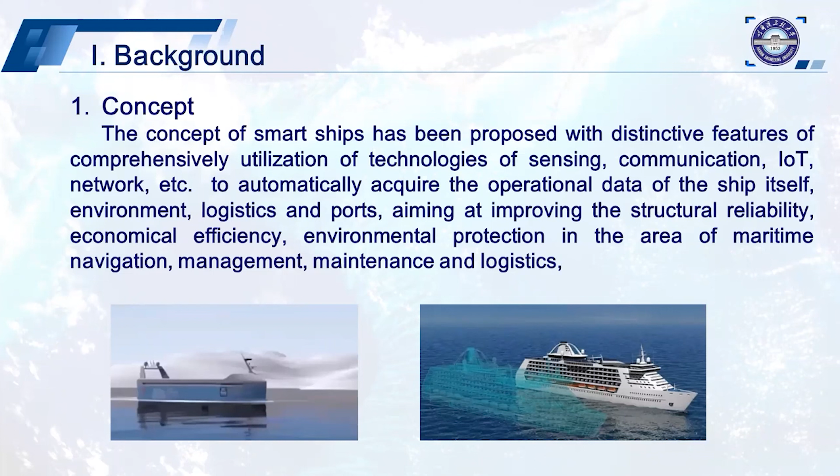So why smart ship? In recent years, we probably have already had the sense that classical mechanics, including structural mechanics and also marine hydrodynamics, have already been quite well studied, and we don't have much new technologies to improve the efficiency of the ships. I mean, we don't have much more we can get from classic structural mechanics, including design, maintenance, etc., to improve the safety and efficiency.

And on the other hand, with the development of hardware technology and the development of software and algorithms, we are able to apply those technologies in the traditional ship industry. So with the help of computer hardware, sensing technology, and algorithms, we're able to improve the safety.

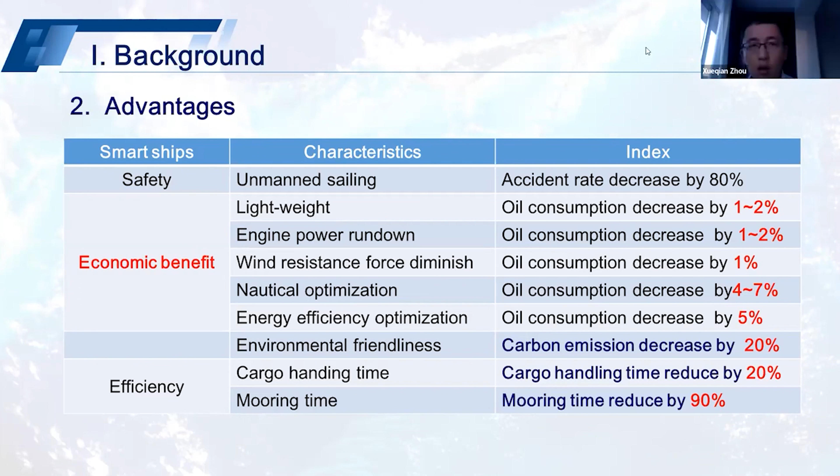Because as we know, almost 80% of ship accidents are due to human factors. So if we make the decision with the help of a smart system, or let the ship make the decision all by itself, we can reduce the possibility of accidents.

And of course, we are also going to have benefits on the economic side. We're going to have better designs to reduce the weight of the ship itself, and from which we're going to reduce oil consumption by 1 to 2%. The same thing with engine power, resistance force reduction, nautical optimization, and energy efficiency optimization. And we're also going to have benefits for environmental friendliness, reducing carbon emissions by approximately 20%.

This is about safety and economic benefits. And for operation efficiency, we're going to reduce cargo handling time and mooring time, which also means we're going to improve the rate of use of the ship itself.

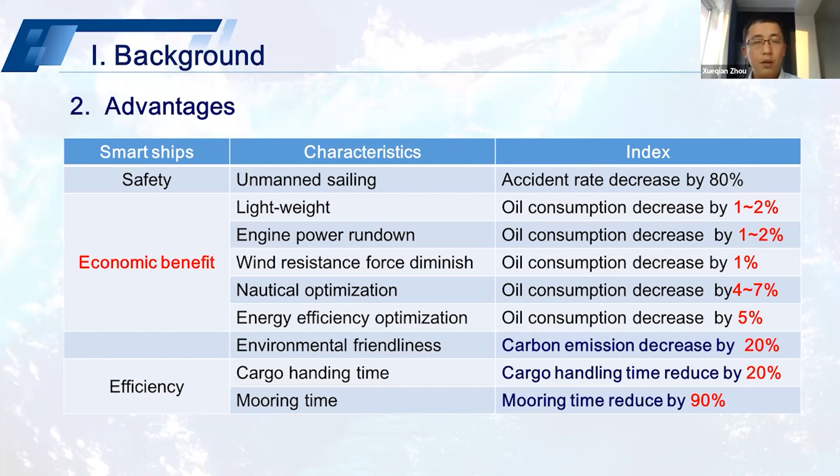In recent years, the concept of smart shipping has drawn the attention of many international organizations like IMO, ISO, and other organizations like the classification societies. The Maritime Safety Committee of the International Maritime Organization carried out a plan for maritime autonomous surface ships in 2018, about 4 years ago. The Working Group 10, under the supervision of Technical Committee 8 of ISO, also focused on the timely establishment of relevant standards on smart shipping in 2017, because before that time there were no standards.

Then in the ship industry, we also know ABS and DNV. They are well-known classification societies, and they have also released classification rules and guidelines for smart ships.

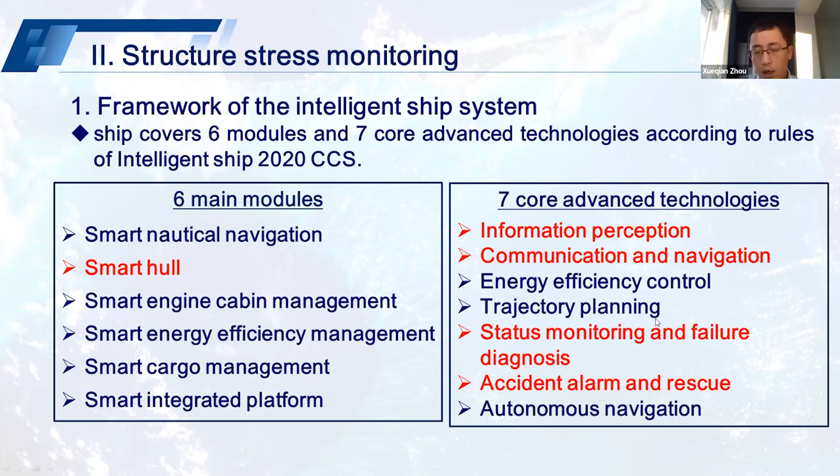We have several main technologies we're going to use in smart hull, but among those, the most important are the information perception and the status monitoring and failure diagnostic technology. To obtain the information about the ship itself, and also to find out the possible failure, in addition to the hardware, like the sensors, the strain gauges, the sensors for acceleration, we also need to use other means to obtain enough information for the analysis and also for the decision making.

The failure diagnostic technologies include, for instance, we have sensors installed on the ship, but we know that no sensors are perfect, and the data we acquired from the sensors may have errors, and mostly actually they have errors. So how are we going to make sure that the discrepancies in this signal are caused by the structure itself instead of the sensors? Or how to make sure that the discrepancy in the signal comes from the drifting problem of the sensors instead of actual failure of the structure?

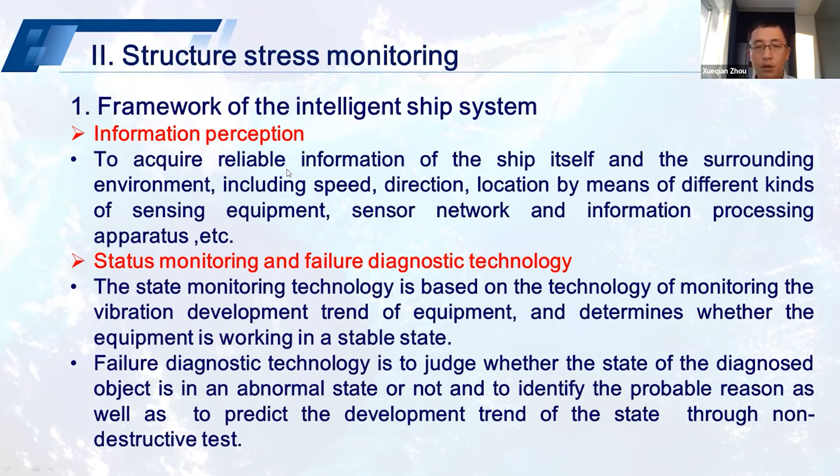The concept of smart hull is relatively new, but structure stress monitoring is not new actually. If I remember correctly, the first application of structure stress monitoring was in the 1990s, and as time goes on, because of the advances in sensor technologies, and the computer hardware is becoming better and better and fast enough to process the amount of data.

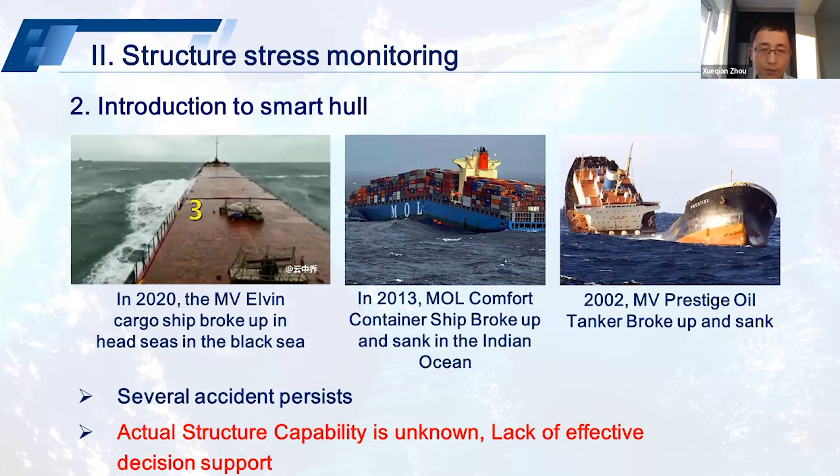The core idea of smart ship is, for instance, in the case of us humans, we have 5 senses. We can see things, we can touch things, we can taste, we can hear, and we can smell. So our brain is like a computer. Our brain is going to process all the information from the 5 senses, and then we're going to make a decision. When it comes to ships, the process is similar.

So we have the sensors to measure the stress, the acceleration, the temperature, the heading, the speed, and the waves. And there are all these sources of information, and we develop a sophisticated system to process the information, and we can have a decision for the best choice strategy of operation.

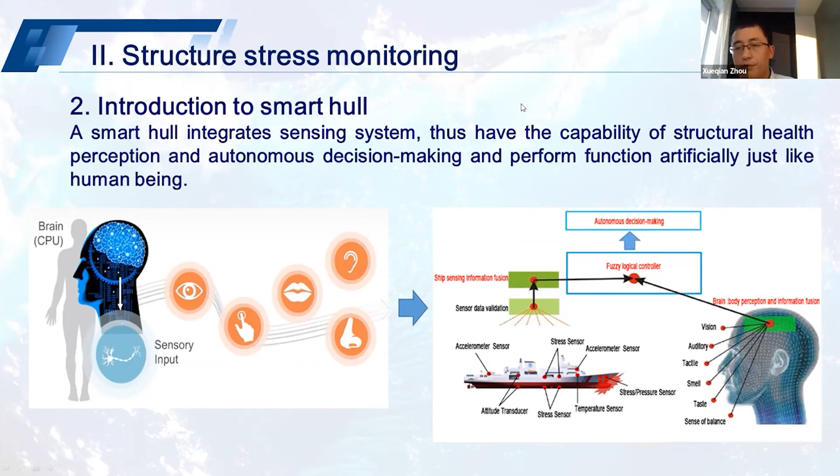When it comes to smart ships, it doesn't mean that we can just simply use some machine learning methods to achieve the objective. We also need to study the classic subjects of naval architecture. For instance, we need to study the wave load calculation and analysis,

because we need to calculate, for instance, the waves acting on ocean-going ships to find out the wave loads, and then we can use finite element analysis to find out the locations where we have high stresses, or we can capture the behavior of the ships, like slamming, sloshing, springing, collision, this sort of responses.

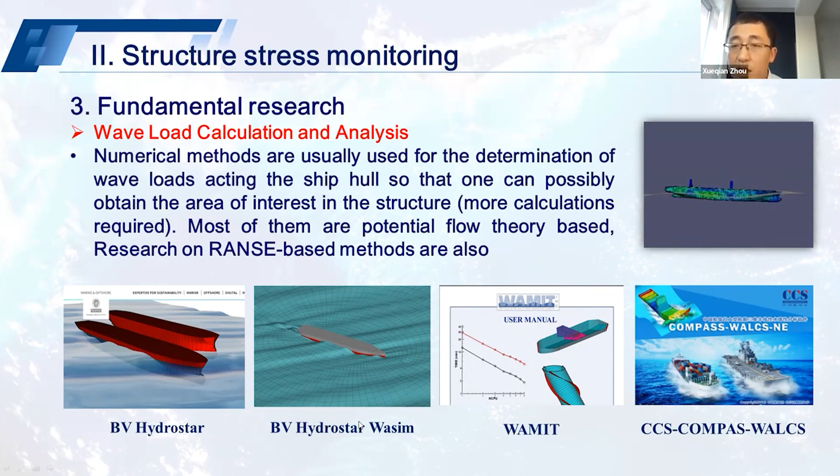And then we also have WAMIT, which dates back to the code by Professor Newman from MIT. The latest version is 7.4. And there is also the COMPASS suite for the calculation of wave loads released by the China Classification Society.

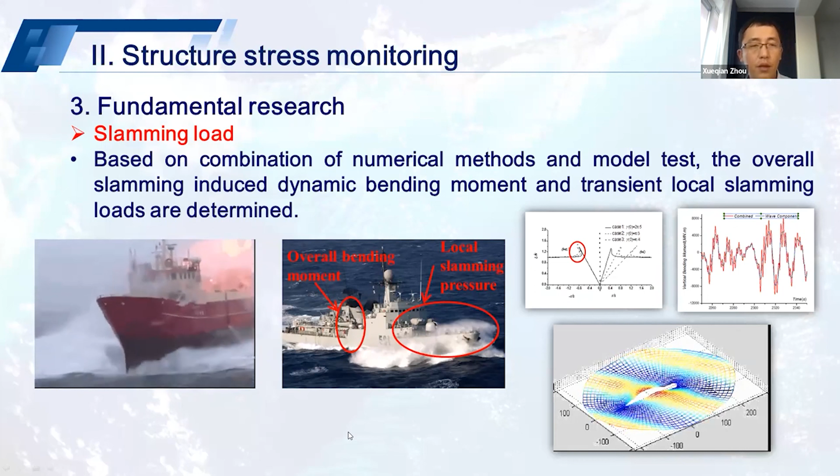And for slamming, because for most of the potential flow based codes, it is very difficult to find out the pressure acting on the flare of the hull, in this case we also use RANS-based methods for the study of slamming loads. Slamming load is important especially for ocean-going ships, like in the North Sea and the Atlantic Ocean, where we have very large waves, and ships with big flares may experience slamming loads.

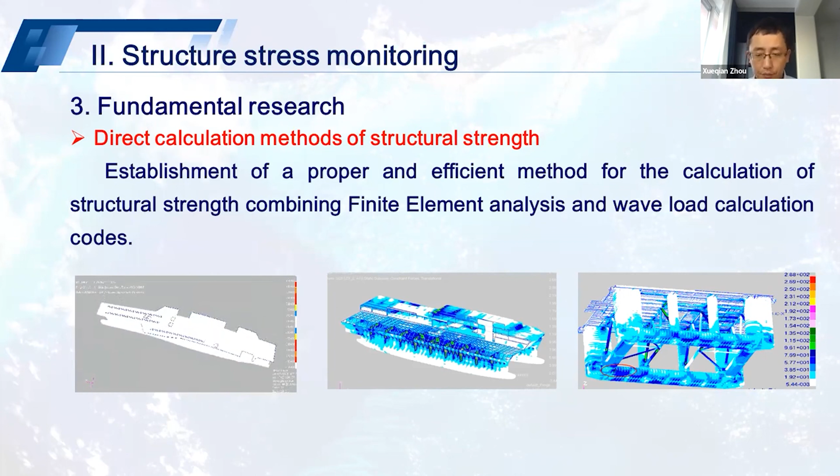Then the other one is the direct calculation methods of hull stress. Basically, it is to calculate the stresses of the structure using wave load calculation codes, and then with the finite element methods to obtain the stress distribution of the entire structure in different cases.

In addition to the numeric methods, we also need to do the experimental study and also the tests at sea. One reason is that in a towing tank, first of all, there is a scale effect, and then the waves we can produce in a towing tank are not actually the exact same as the waves we experience at sea.

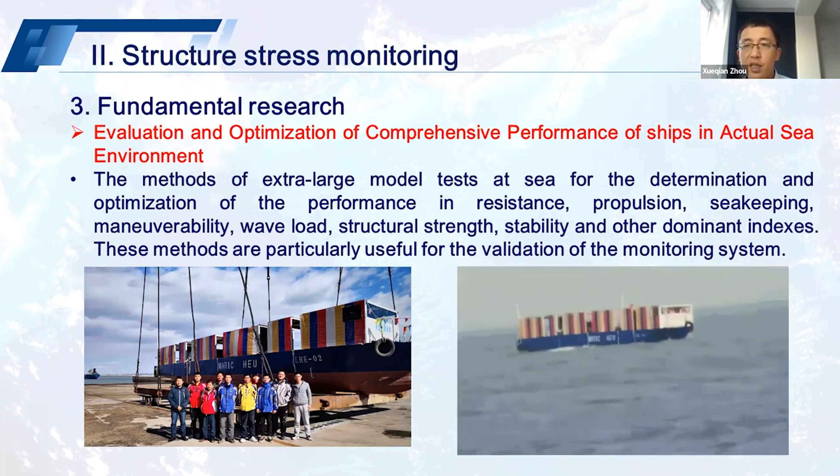So for this reason, some researchers have been carrying out very large model tests at sea, so as to eliminate the shortcomings of the tests in a towing tank. The first one was more than 20 years ago. The French Navy carried out a large model test at sea for resistance and propulsion. And then this technique has been used for the investigation of other performance like the wave loads and seakeeping, etc.

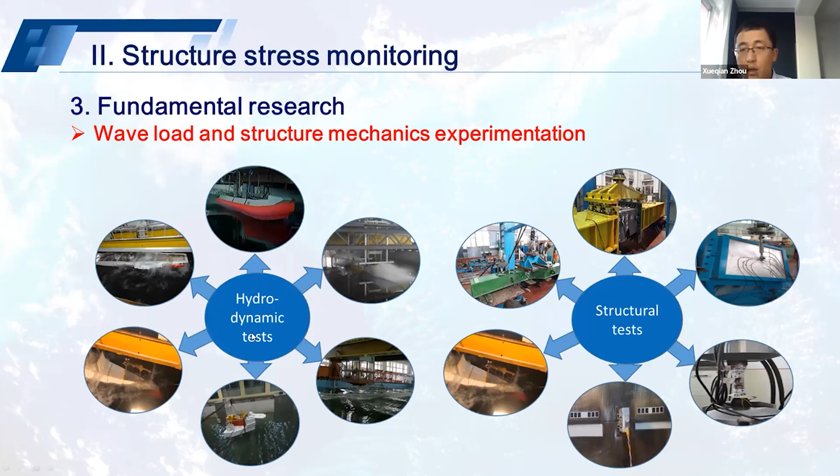So when it comes to this structure, we need to determine how much is the load acting on the structure. So for this, we need to do hydrodynamics. So there are various topics in hydrodynamics, and we need different kinds of facilities. And the same thing with the structures. We also need to use the right facility to do the investigation.

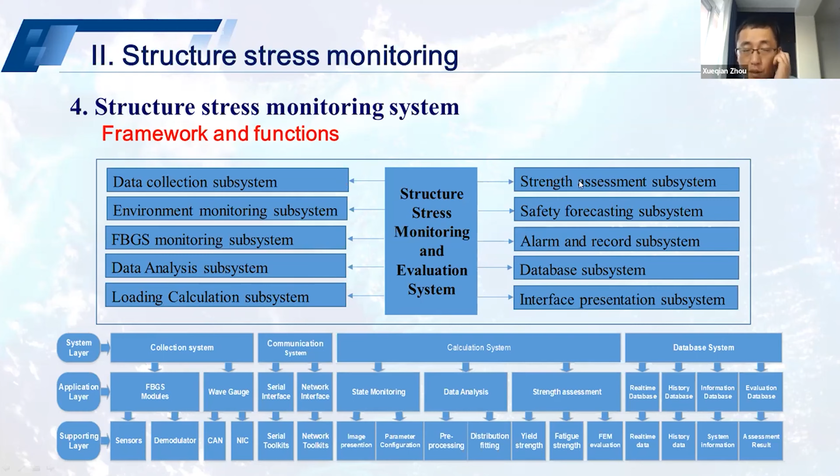So for an example of the structure stress monitoring system that we have been using here in China on many ships, there is this data collection system that acquires the information of the state and also the structure stress, and then we're going to process the information in the system.

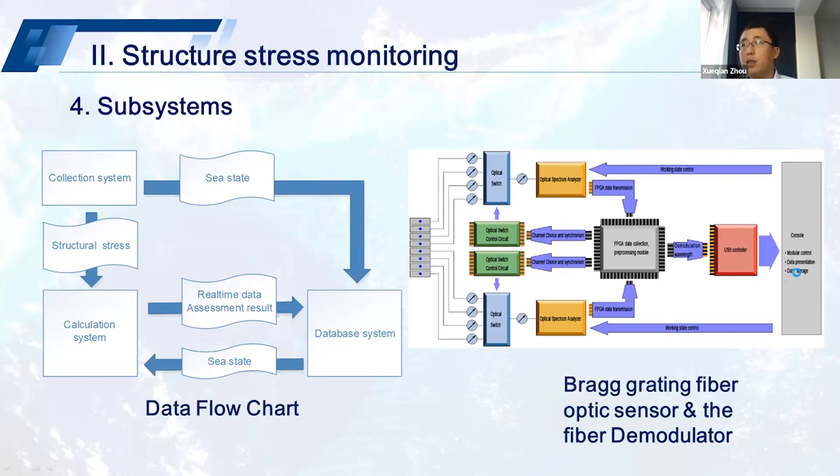And on the other side there is the so-called fiber demodulator, so it can read the change in the wavelengths and then find out the deformation at the location where we have the sensors, which means that we're going to have the strain, and then we can do the calculation. We can find out the stress.

And this is an example of a communication subsystem. There are also many elements. We have the information about the stresses, but sometimes we also need the information from other onboard systems, for instance, the waves, the speed. We also need that information to make the analysis. Then, of course, we need to do the calculations. There might be a lot of calculations on board.

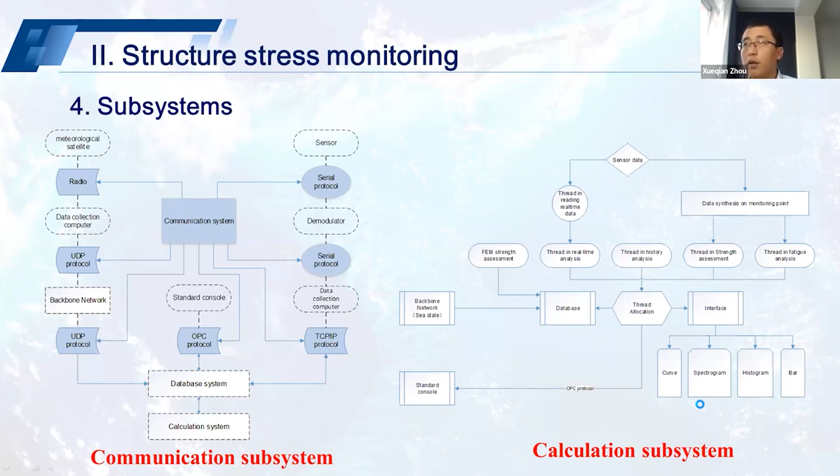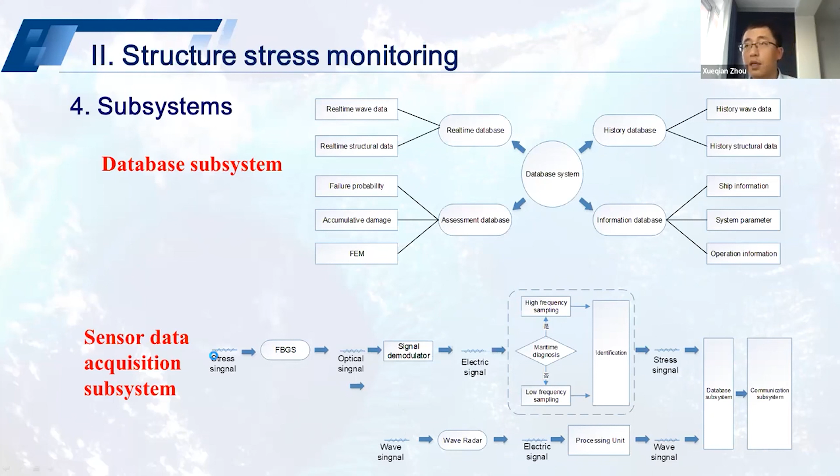Then there is also the database subsystem, so we have real-time wave data, the structural data, the failure probability, cumulative damage, and then the historic wave data, the statistics, information, etc. And the sensor data acquisition system, I'm not going to talk too much about, because that is completely another subject.

As I have mentioned earlier, every structural stress monitoring system must have the function of evaluation, the assessment module, because we need to tell the crew whether it is dangerous at the moment. So here we have a table. This is one of the levels of alarm, depending on the stress.

Sorry, Xueqian. We have short time, please. 5 minutes. Okay, I'm going to speed up.

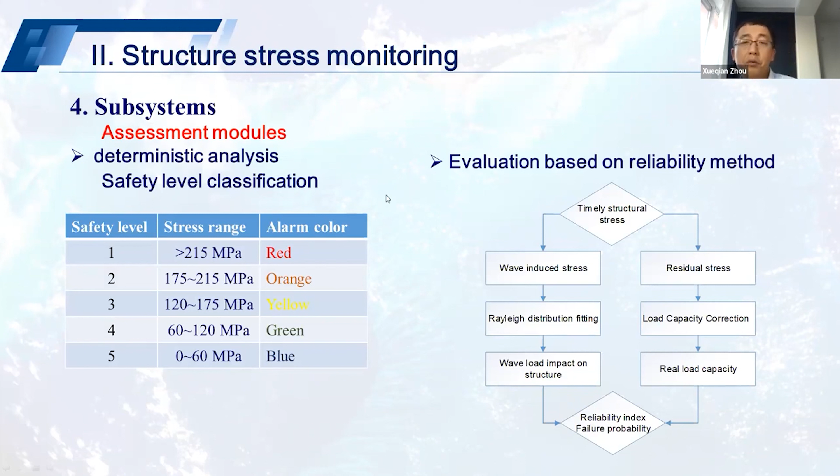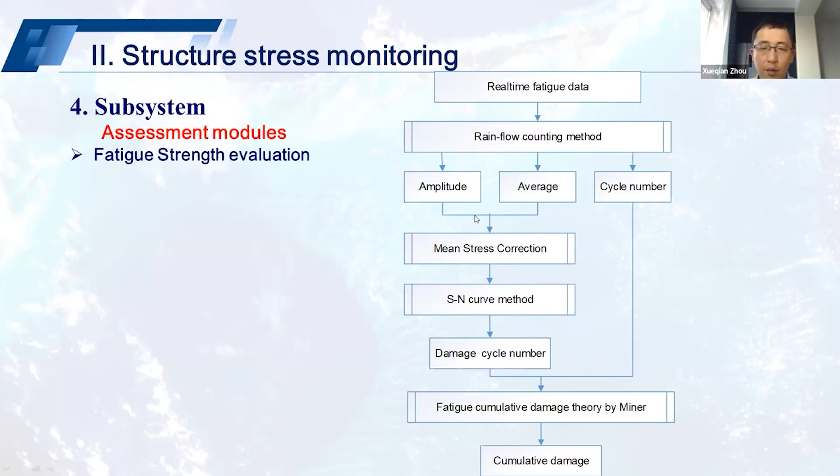We also have different methods for evaluation. We have reliability method based evaluation, and we also have deterministic analysis evaluation for the assessment. And this is for the fatigue strength evaluation, because we have the detailed information of the history of the stress, so we can use methods, for instance, to find out the cumulative damage to the structure.

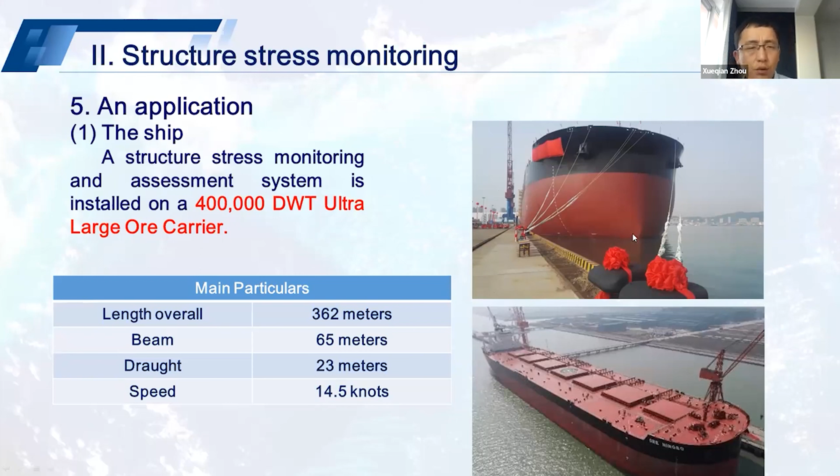This is the application. I'm going to quickly go through this. So this is a very big ship, a 400,000 DWT ultra large ore carrier, and on this ship we did the optimization of the sensor distribution, which means we need to find the locations where we install the sensors so as to find out the global response of the hull structure.

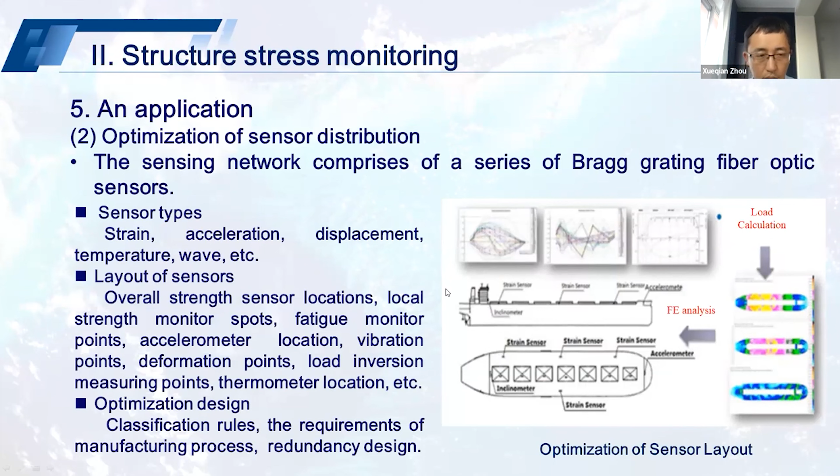But there are also many challenges in this area. So, like how do we identify the drifting problems, and how do we make the calibration, zero drifting, temperature drifting. So one of the possibilities is that we test the sensors of the same batch in a lab. For instance, here we have a box where we test the error characteristics of the sensor from minus 20 degrees Celsius up to 60 degrees Celsius.

And another challenge is the multi-source data fusion: the stress, temperature, acceleration, ship speed, sea wave parameters, loading conditions. So how we're going to find out the most useful, helpful information from all these sources. So this is also a challenge. And plus, the amount of data can be very large. For the ship that we have just seen, we had about one terabyte for 3 months of operation.

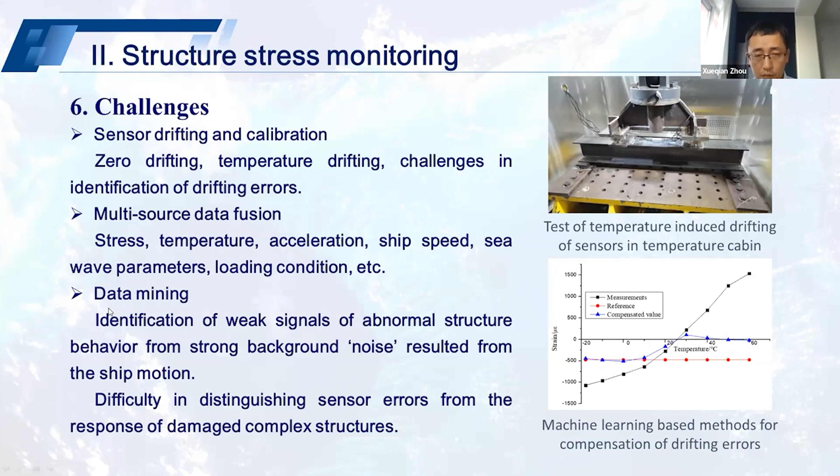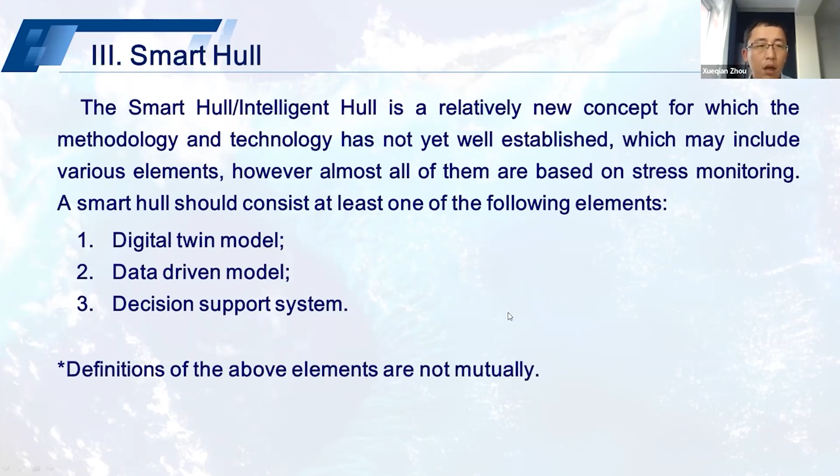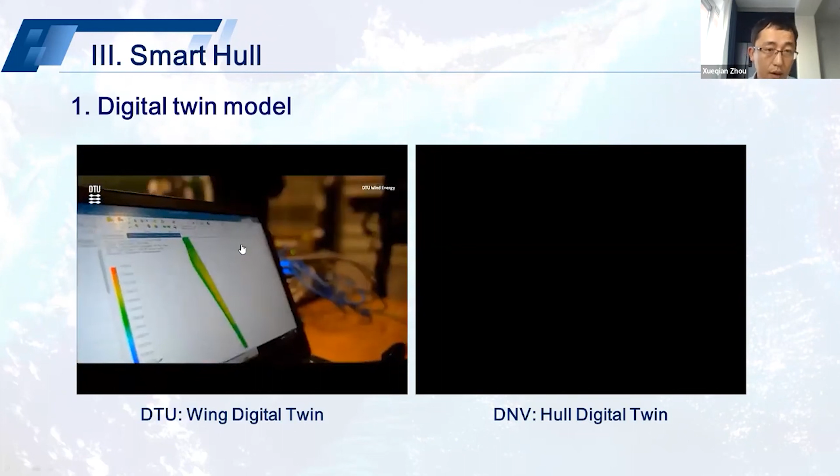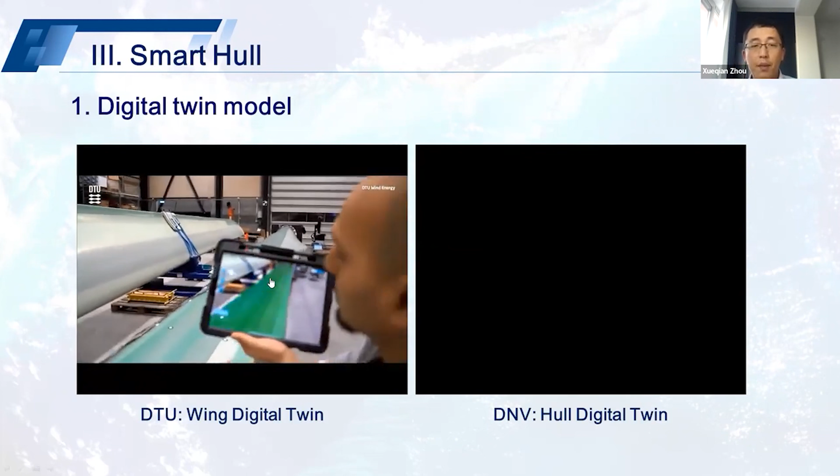For smart hull, because the smart hull is a very new concept, a smart hull should consist of at least one of the following elements: digital twin models, data-driven models, or decision support systems. For the digital twin model, here there are 2 examples. Here is one digital twin model for a wing, and as we can see, when the actual wing is turned and is pressed and released, we can see the response on the screen. Which means that the stress distribution is reconstructed.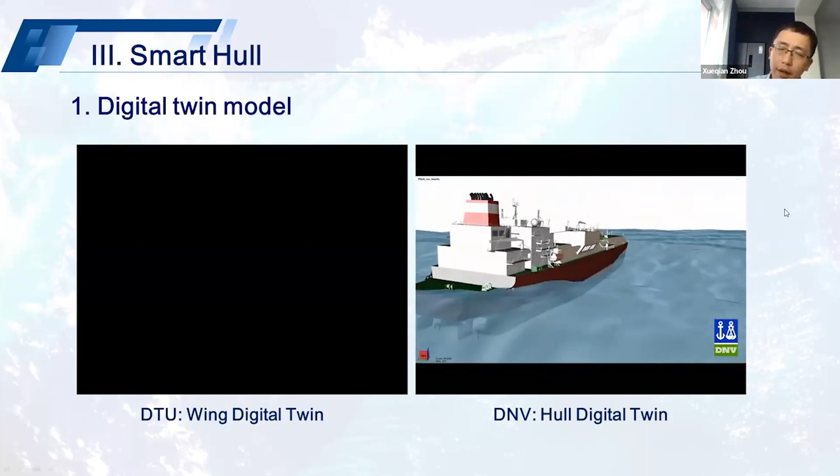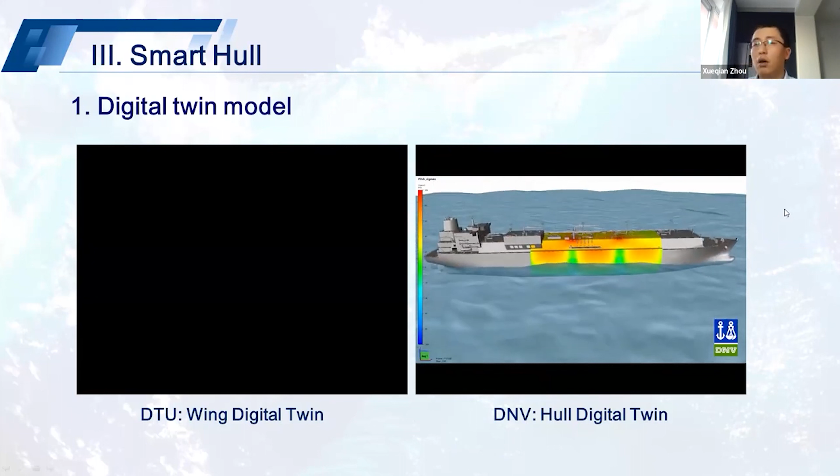And this is another one. This is the hull digital twin model by DNV. So what they did is that they collected the stresses at particular points or locations of the hull, and then reconstructed the stress distribution of the hull of interest. For instance, in this case, we have the largest stress at midship, caused by the bending moment.

So there are several methods for the reconstruction of the stress distributions. The popular method is that we pre-calculate the stress distribution of the hull, and then we install sensors on particular locations, and then we find out the best match when the ship is operated at sea. We find the best matches from the database, and then we use the previously calculated stress distribution for the analysis afterwards, or for decision making.

For the data-driven models, that is how to obtain the changes in the ship structure itself, the plate thickness, cracks, damages, and also the environment and other exterior factors. So for the structure, we know that as a ship is operated over time, the thickness is going to change. There is going to be erosion, corrosion. So how do we find out these changes?

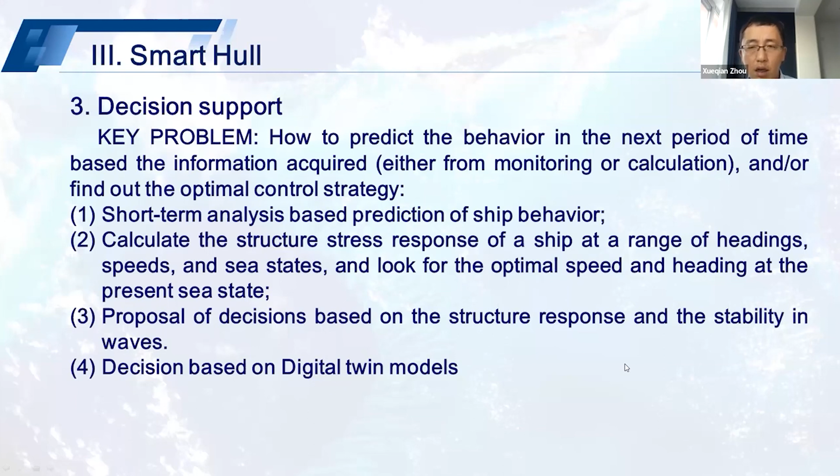Okay, when it comes to smart hull, there are many challenges. For instance, nowadays almost all the hull structures are based on linear FE calculations. So non-linear FE calculation is still a challenge. Like accurate changes in the structure itself, like the thickness, and reconstruction of the local stress distributions, because we cannot install a very big number of sensors on board.

So how do we reconstruct the local stress distributions, and the prediction of sea waves and the motion and stress response of the hull in the next period of time, and the prediction of complex structure behaviors, the evolution of crack propagation, corrosion, and damage, and also the structure safety, maneuvering, and stability integrated operation decision in waves. And there are much more than this because it's still being studied, and I should not elaborate too much on this because of time.

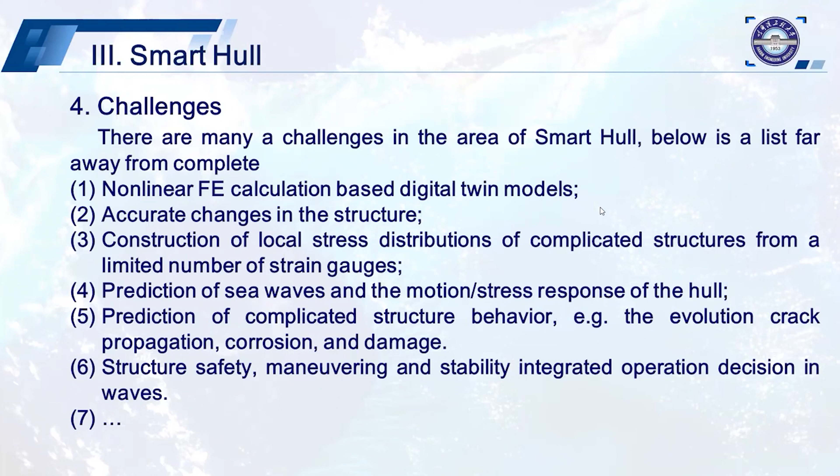And in some way we find a way to reduce dramatically the computational time by using artificial intelligence. For example, we train some neural networks to mimic what finite elements can do, based on analytical formulations.

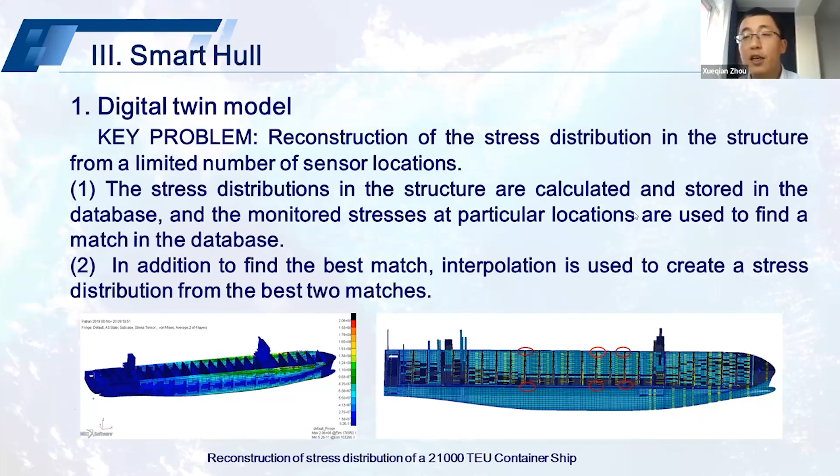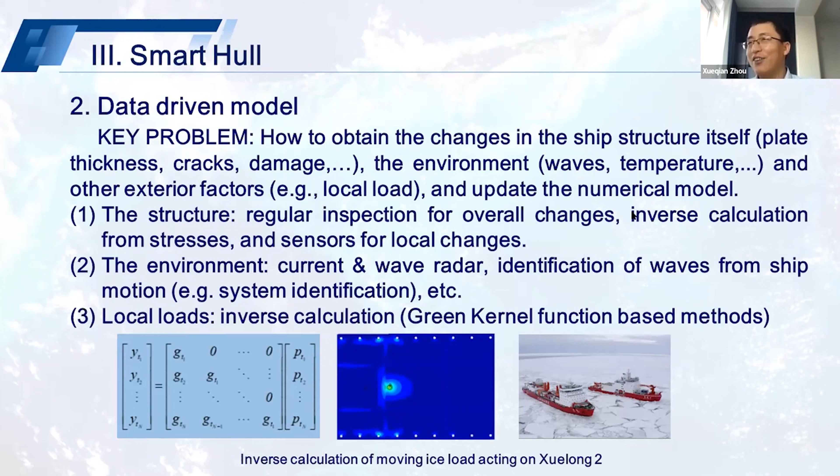Yes, Professor, this could be really good. But the thing is that with machine learning based methods, how are you going to find the right samples, the training sets? This is a challenge, because we cannot. Yeah, this is very difficult.